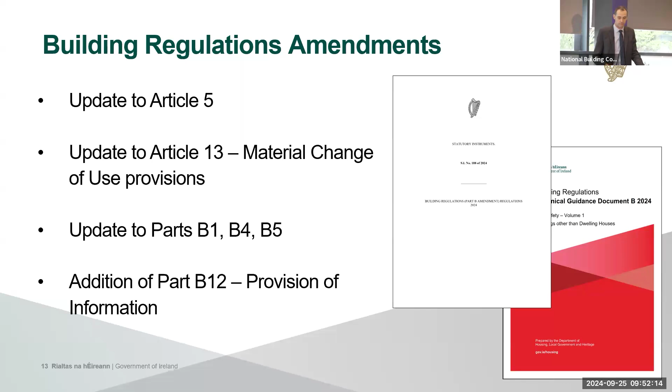It's divided into 5 key sections, and for 3 of those - means of escape in case of fire (Section 1), compartmentation (Section 3), and access and facilities for the fire services (Section 5) - there is a reliance on a suite of documents, cited documents within the TGD itself, that provides principal guidance for the design, configuration and layout of buildings. For example, for buildings containing flats, the current technical guidance document relies on provisions of BS 5588 Part 1, plus other parts of Technical Guidance Document B.

The application of those sections of those documents is dependent on the intent set out in the Technical Guidance Document, and it applies across the board. So the larger and more complex the building, the more of these documents apply.

As buildings get taller, the likes of the essential characteristics for the design of firefighting shafts is brought to bear in Section 5. As they get more complex, such as the provision of atria in buildings, the provisions are drawn from BS 5588 Part 7.

TGDB has existed in the state since 1991. These documents were long-standing and well-established, but in the interim, from the development of Technical Guidance Document B, particularly 2006, to the redevelopment, we're painfully aware that all of these documents have been withdrawn and replaced. And in many cases, the replacement has subsequently been withdrawn and replaced.

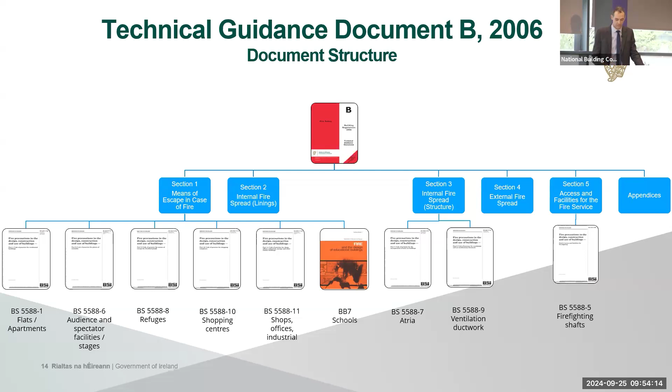For this and for many reasons, for clarity, one of the principal design considerations of the redevelopment of the technical guidance document was clarity and consistency of approach, a harmonious technical language, a single understanding of application of the proper provisions of technical guidance. The vast majority of what we can term principal design provisions have been incorporated directly into the technical guidance document.

For example, for the design of flats, there's a reliance on TGDB 2024, and all of the necessary provisions for the design of those buildings are incorporated directly into the technical guidance document, as they are for ventilation systems, firefighting shafts, the design of schools, and the design of atria. It is all in one document, one harmonious language, breaking those characteristics of interpretation across varieties of different documents.

There has been an expansion and modification of many of the provisions of the technical guidance document. The scope has been updated in TGDB.

The technical guidance document, at its fundamental principles, holds with all of the technical guidance documents in that they are designed around application towards simple and non-complex buildings. Buildings are, and can be, incredibly complex - complex in terms of internal configuration, in terms of use, and in terms of height.

For this reason, the technical guidance document does maintain its application to simple, non-complex buildings, but does have a limiting factor in terms of overall height. For care facility buildings, previously termed institutional, above 30 metres, the TGDB will no longer have effect, and for all other buildings, above 60 metres.

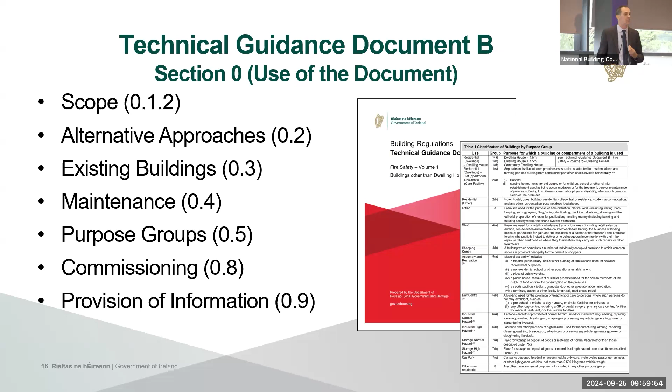This gives direct application to the two purpose groups and specific subgroups. So where there are specific clauses for day centres where children are accommodated on the premises, purpose group 5B2, there are specific clauses for schools under purpose group 5A. And so it allows a greater finesse and clarity in the technical guidance document.

There's been a holistic application to the technical guidance document in terms of its content and provisions. It doesn't operate by itself. We don't build a Part B building and a separate Part A building and a separate Part M building.

We build one contiguous building at the same time, even though we have separate approval processes through the building control regulations, particularly the fire safety certificate and disability access certificate. But we do build this as one building, satisfying all of the parts of the second schedule that are relevant at the same time, with that keen understanding that no one part can contravene another part of the second schedule as set out under SI 497.

So there has been an alignment of provision within the technical guidance document. The method of measurement of doorways for Part B and Part M is the exact same method of measurement. So we're not measuring doorways in two separate distinct ways. We measure doorways the same way under TGDB.

Our door widths have been aligned in terms of minimum door widths for escape to align with that for access and use, so that the 800mm requirement for Part M is the same as the 800mm requirement for Part B. And there's been a commensurate increase in capacities having regard to that.

Lobby dimensions in TGDM were slightly larger than that of TGDB, where they lead on an accessible route. And similarly, now for lobbies leading to a refuge, the lobby dimensions are exactly the same as a Part M lobby dimension. So we design the lobbies the same way, we design them once.

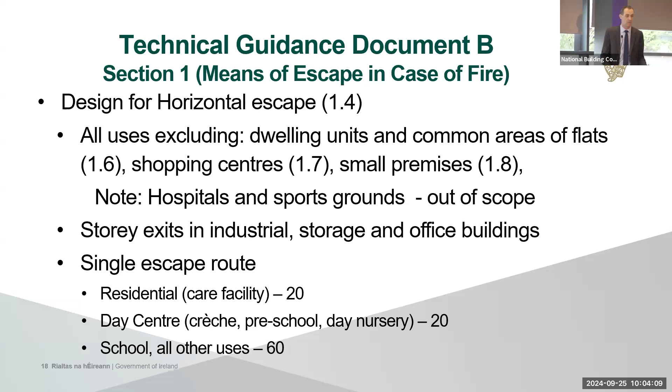And for single escape routes, there has been a maintenance of the single escape route characteristics for up to 20 persons for residential care facility buildings. For a day centre, creche, preschool or nursery, purpose group 5B1, there is a limitation of 20 persons in keeping with current guidance published by the National Directorate for Fire and Emergency Management, and for schools and all other uses, an increase from 50 to 60.

There's been an update to our provisions with respect to care facility buildings, additional guidance on door closing devices, both across corridor doors and bedroom doors, utilising magnetic hold open devices and free swing door closers. There's been a new provision introduced regarding walls between bedrooms, that walls between bedrooms are required to be fire resisting unless a suppression system is provided throughout the care facility building.

This provision doesn't apply between a bedroom and an ancillary accommodation or another part of the building—it's not a sleeping risk, so they always have to be fire resisting. And a subtle clarification that it doesn't apply between a bedroom and its associated ensuite, as an ensuite is considered to be part of the bedroom.

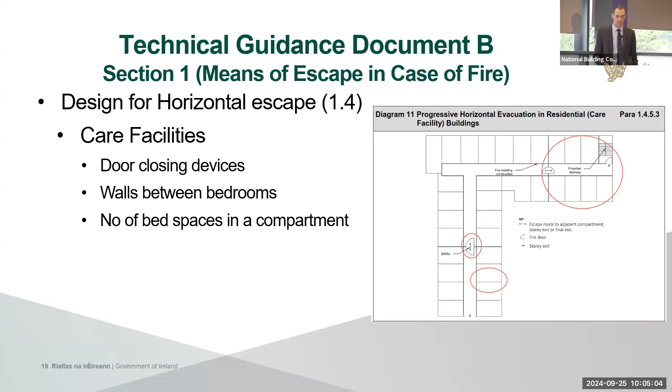There's a limitation of number of bed spaces in a compartment to 10. However, that's not applicable in respect of a building with a suppression system.

There's been modification to external escape routes, an upper threshold limitation for the use and application of external escape routes to a floor level of 11 metres.

We've included guidance in terms of audience and spectator facilities where there are specifically designed tiered seating spaces in buildings. There's a clarification in terms of equity of use of buildings, that where there's availability of exits, it must be available to all who would use the space. So irrespective of ability or of how an individual gets to seating, if they have an impairment, they have an entitlement to equality of availability of exits.

This again, the language for our audience and spectator facilities is aligned to that of Technical Guidance Document M, where there are similar provisions for tiered seating.

There are provisions incorporated in the technical guidance document for premises with a stage. Again, a clarification post the public consultation that these are buildings with a dedicated stage area, so specifically designed for theatrical performances with or without a proscenium wall. But where they do have a stage, we do have specific provisions and clauses brought into the technical guidance document.

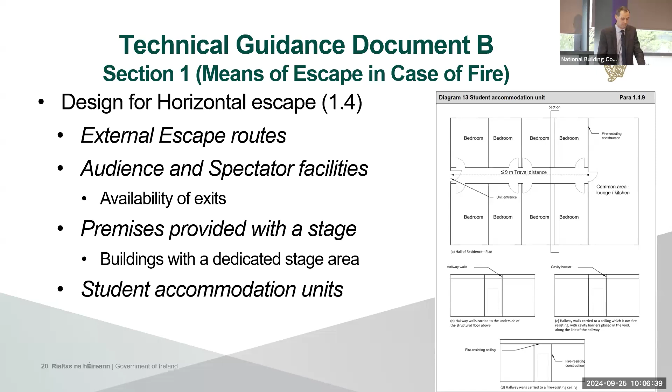There's also new provisions for student accommodation units, specific units designed for the use and exclusive use of student accommodation, which draws on guidance that is standing and well established.

For design for vertical escape pathways, for single escape routes for assembly and recreation or day centre buildings, purpose group 5B2, there's an upper threshold height of less than or equal to 5 metres before a second stairs is required. For a day centre building predominantly used for children, its limitations are ground and upper storey, where there's less than 20 children accommodated on the upper level, in keeping with current guidance.

Single escape routes are appropriate in buildings containing flats meeting the provisions of section 1.6, and for any other purpose group not already mentioned, an upper threshold height of 11 metres, above which an alternate escape route is required, or basements deeper than 3 metres.

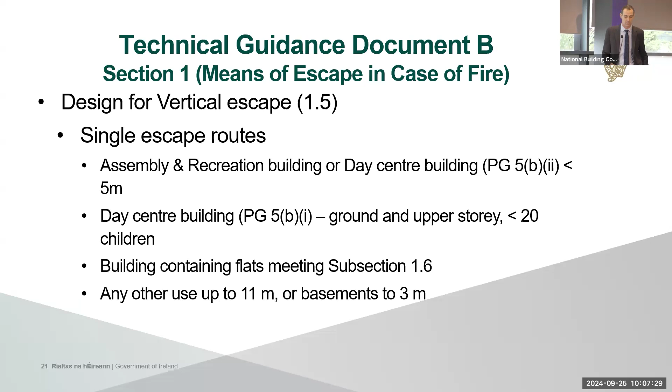Building on the guidance incorporated in Technical Guidance Document B 2006 reprint 2020, where new provisions were brought forward in respect of open plan flats, there has been a new section created, section 1.6, specific and exclusive to the design of buildings containing flats, so that the provisions in respect of escape within the unit, horizontal escape pathways, corridors and deck approach, and vertical escape pathways are incorporated explicitly in section 1.6, with additional provisions for ancillary accommodation to buildings containing flats.

Again, in keeping with the new definitions introduced in 2020, the flats in the state have been subdivided into 2 key types: those that have a protected entrance hallway and those that do not, termed for the purpose of TGDB as an open plan flat.

For PEH flats, the standing provisions of a travel distance within the corridor of 9 metres continue to apply.

For open plan flats, the fire safety characteristics are dependent on a number of key design elements: the travel distance within the flat, whether it's less than or greater than 9 metres; whether there's an available alternative escape route, be it a window directly to the outside for a floor less than 4.5 metres, or a door for flats operating above this height; and whether there's a suppression system provided within the flat, whereby there's no requirement for an alternative escape route, and the maximum travel within the flat is less than 20 metres.

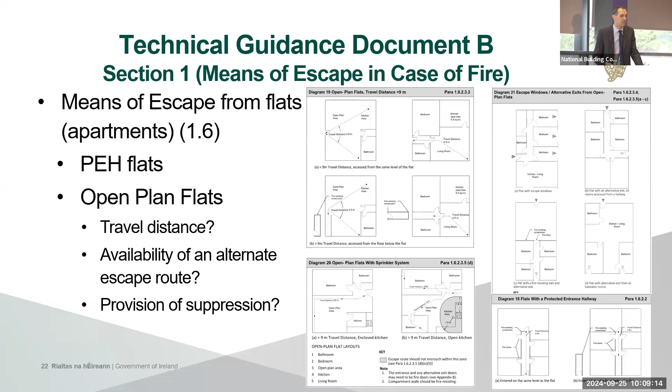There's been an expansion of the provisions with respect to maisonettes, or a flat that has its habitable accommodation split over 2 or more stories within the technical guidance document. Divided into 2 key types: those that have a floor less than 4.5 metres above ground level can be treated as a dwelling and have similar provisions to that of Technical Guidance Document B 2017, for which new drawings should look very familiar to anyone involved in the design of houses.

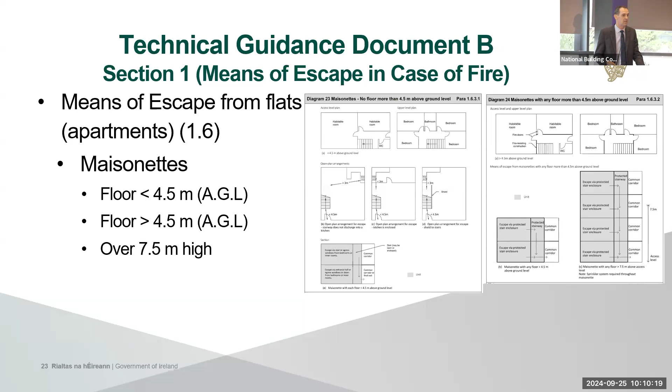And for a floor greater than 4.5 metres above ground level, for any maisonette above 4.5, or where there's a floor above 4.5, the maisonette deserves and should have a protected stairway enclosure. There's an additional clause given in the technical guidance document that where there's a change in height from the access point of the maisonette to its upper floor of more than 7.5 metres, a suppression system should be provided throughout the unit. Again, these provisions are substantially similar to that of Technical Guidance Document B 2017.

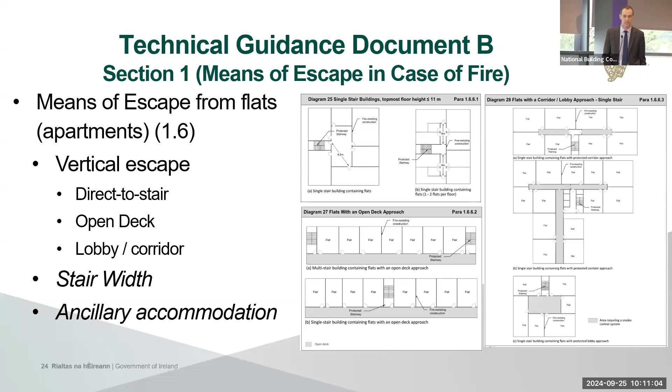There are provisions given in the technical guidance document for vertical escape, that's for direct to stair designs, for open deck designs, change from balcony approach to reduce confusion between a private balcony and an open deck approach, and a lobby corridor approach building. There's been a clarification in respect of the minimum stair width design of buildings containing flats, a minimum width of 1 metre, but also designed for the expected and simultaneous evacuation that should be designed into all our buildings containing flats, following on from the policy position provided through the report of the Fire Safety Task Force in 2018. And there's guidance with respect to ancillary accommodation to buildings containing flats.

Moving on to fire detection and alarm systems. In keeping with the functional requirement that has been introduced, a minimum provision of system for fire detection and alarm systems has been provided in a table in the technical guidance document so that all purpose groups are now covered through the direct explicit provisions of the TGD. These do apply to works to which the building regulations relate. All of these systems, then their performance is to be achieved through the national standard IS 3218.

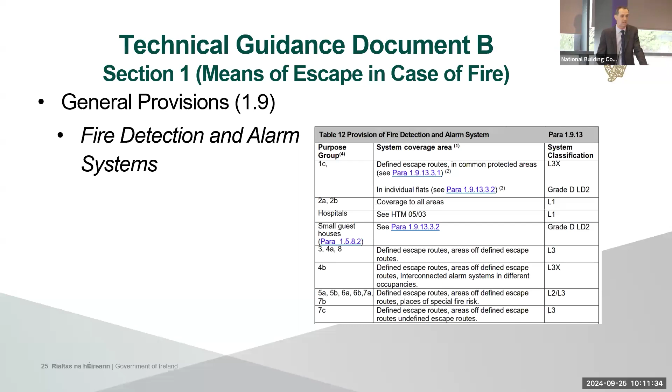Again, in keeping with the holistic approach to our guidance for our buildings, we do have a comprehensive suite of provisions for access and use of the built environment delivered through Technical Guidance Document M and the Disability Access Certificate application assessment and grant process provided through the local authorities.

In equal measure to our enhancements of accessibility in the built environment, there is a reasonable expectation for equality of egress from buildings as well. And for that reason, there are substantial additional provisions given in the technical guidance document for the provision of refuges in buildings.

The refuges can be provided in key locations in a building: in a stairway, in a lobby that has direct access to a stair, an adjoining compartment except in a building containing flats, in an external escape stairway provided that the refuge can be accessed appropriately, or in the open air for a common deck.

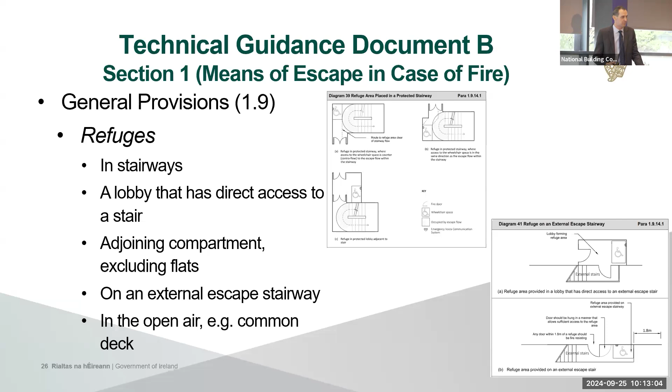It's important to note there is the universally accepted symbol for accessibility provided as part of the refuge, but it's also important to note that not all disabilities are visible, that these refuges are designed for everyone who needs to use them, be they in a wheelchair, or have a cognitive, dexterity or mobility impairment, as a place to rest while evacuating a building, and this becomes particularly important in our taller, more complex buildings.

Pause briefly on section 2 of the technical guidance documents, moving from means of escape in case of fire to the precautions of fire spread within rooms and spaces designed within buildings.

At the moment, the technical guidance document refers to 2 test standards for internal linings and elements of construction, BS 476 and IS EN 13501 Part 1, which are the European standards used extensively in our construction products regulations and declarations of performance.

For new works, new buildings, and for new elements going into buildings, there has been an alignment to the European test methodology, IS EN 13501 Part 1, for all materials going into buildings. Those classifications from A1 through to F, as might be familiar in a declaration of performance, are now expected for all construction products going into buildings. There is no reference for new buildings or works to BS 476 Part 6 or 7.

The terms and definitions of non-combustible and limited combustibility have been moved to Section 7 of the technical guidance document, and we'll come on to the design and intent and the application of Section 7 a little bit later on. There are surfaces excluded from these provisions, and there's an important clarification to the use and application of test methods. It is recognised that the European standards don't cover all construction materials that may be used and utilised in a building.

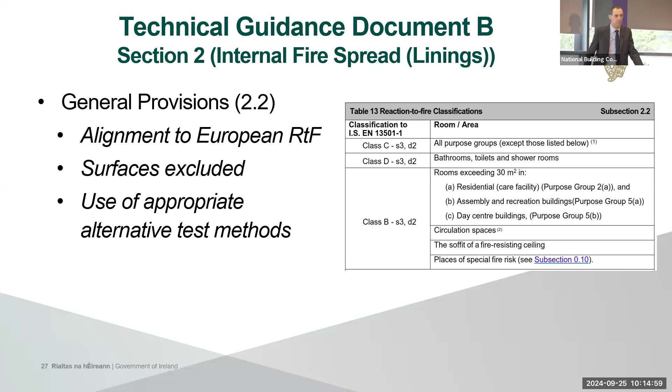To require them exclusively might work to exclude certain materials. However, there is an appropriate application of alternative test methods where the European standard would not be permissible, but where the equal performance in use and application can be proven.

For the construction of compartment walls and floors under Section 3, what is commonly termed the non-combustibility clause - the requirement for elements of structure to achieve a certain reaction to fire classification - has moved from 10 to 11 metres. Keen to point out that this is a provision of this technical guidance document, not of the building regulations themselves.

For buildings above 15 metres, there is a requirement that where a compartment floor meets an external wall, certain precautions are taken to inhibit fire spread bypassing the robust compartmentation provided within the building, by means of either a suppression system, a fire resisting zone of 900mm high, a projection of 0.5 metre, or a setback of 0.5 metre. There are precautions given in the technical guidance document for the junction of compartment walls with external walls to improve fire performance and flanking fire spread from one compartment to another.

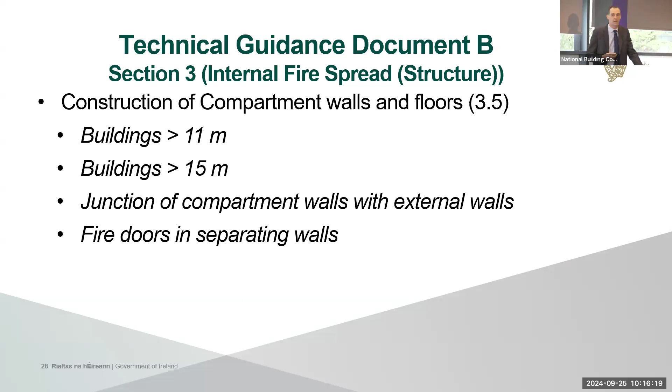There was a provision in Technical Guidance Document B 2006 for the provision of fire doors in separating walls, or walls dividing one building from another, capable of being used for evacuation. That is being removed from Technical Guidance Document B 2024 for new works, but there are again provisions given in Section 7 for existing situations.

Under the special provisions of Technical Guidance Document B, we've maintained provisions for car parks in buildings and included substantial additional content in respect of the design of atria, flats, care facility buildings, other residential buildings, offices, and other non-residential buildings, for which extensive provisions in keeping with current guidance and diagrammatic solutions are given for the design of atria within buildings.

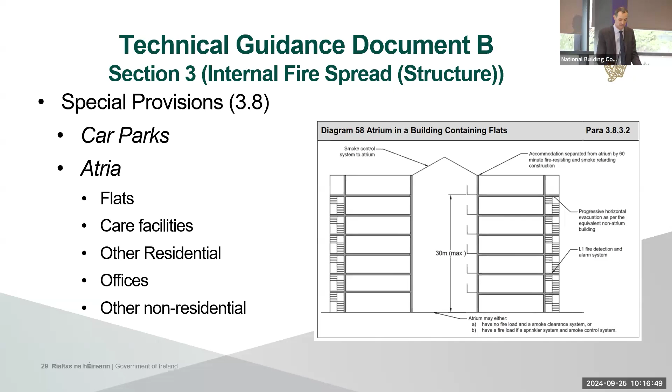I mentioned as part of the regulatory change to the functional requirements, there was a new regulation under Part B4 to inhibit fire spread on the face of the building. The guidance to give effect to this functional requirement is provided under Section 4.3 of the Technical Guidance Documents, the restriction of external fire spread on external walls.

A key threshold height for buildings is 15 metres, above which the entire external wall build-up, particularly for sleeping risk buildings, has to achieve a Class A2, S3, D2 reaction to fire classification, with the exception of appropriate excluded elements such as membranes, laminated glass, and thermal bridging materials.

There's an acceptance and acknowledgement of full-scale testing, that the BS 8414 test can be utilised in place of this requirement. However, it is the tested system and certified as such that can be provided on walls.

There's also an overarching requirement to fire safety in buildings, that irrespective of the height of the building, designers should be cognizant and aware of materials provided in buildings to ensure that they would not contribute to fire spread over the face of a building in a manner to affect the safety of the occupants.

Similar to our elements of structure and internal linings, the reaction to fire classification for external walls and for roofs is to the European test method. So again, a simplification of that test language, where we expect to see materials to have a declaration of performance - it is those declarations of performance that can provide the proof of proper materials.

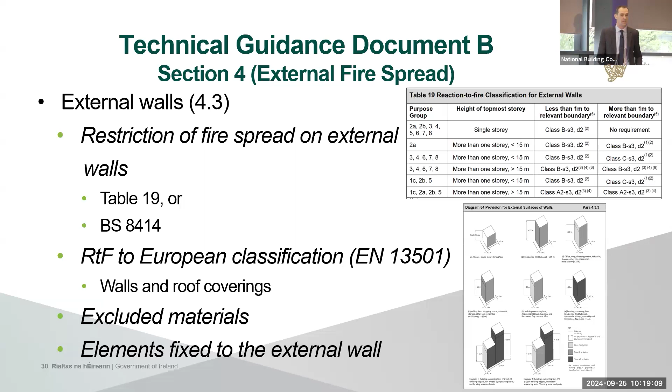Again, in keeping with international practice, where there are elements fixed to an external wall, such as a balcony, solar shading, or other materials, there should also be an adherence to the reaction to fire classification to ensure that external elements do not contribute to fire spread from one floor to the next, again with a threshold height of 15 metres. So where an external wall is constructed robustly to inhibit fire spread, the performance wouldn't be reduced by external elements.

For the key elements of our performance of space separation and restricting fire spread from one building to another, a building on fire should not disproportionately impact a building on a neighbouring site. There's been a new provision included for walls within half a metre of the boundary, where there are limitations on openings in the external wall, maintaining the provisions for between half a metre and a metre, and for external walls greater than a metre, the normal reaction or external fire spread calculations can be used and applied.

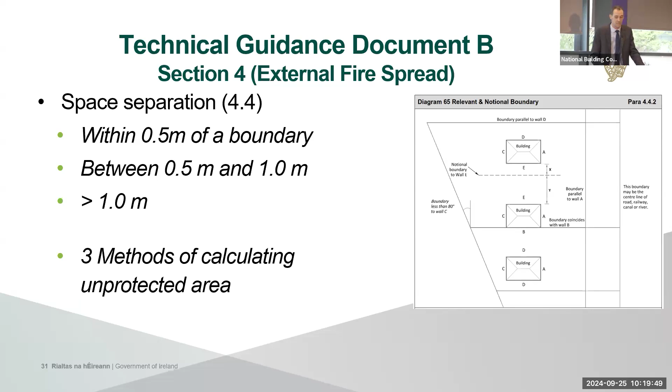Moving on to section 5 and some of the changes to access and facilities for the fire service provisions. There's been an introduction of the requirement, or the measure, for dry risers in sleeping risk buildings and shopping centres with a topmost floor height greater than 11 metres but less than 20 metres. For any building above 20 metres, the normal precautions of a firefighting shaft, as designated in technical guidance document B - that is the stairs, the lift and the lobby incorporated in a 2-hour wrap - are to be provided in buildings.

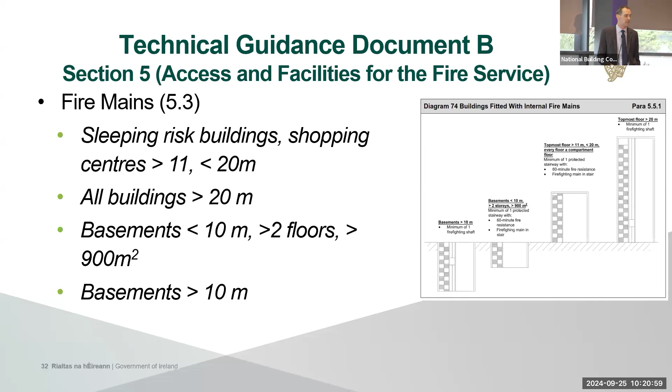Similarly, for basements that have a depth of less than 10 metres but more than 2 floors, more than 900 metres squared, should also have, under the technical guidance, a fixed dry riser or dry falling main located in a protected stairway. The same precautions for basements deeper than 10 metres requiring a firefighting shaft have been provided, and new diagrams have been provided in the technical guidance document to provide visual clarity to the measures.

There are provisions given in the technical guidance document for the electrical isolation of key systems, for the full isolation of premises, for high voltage discharge lighting, as is found in the current technical guidance document, and for photovoltaic panels, all relying and working with the electrotechnical standards IS 10101 published by the National Standards Authority of Ireland.

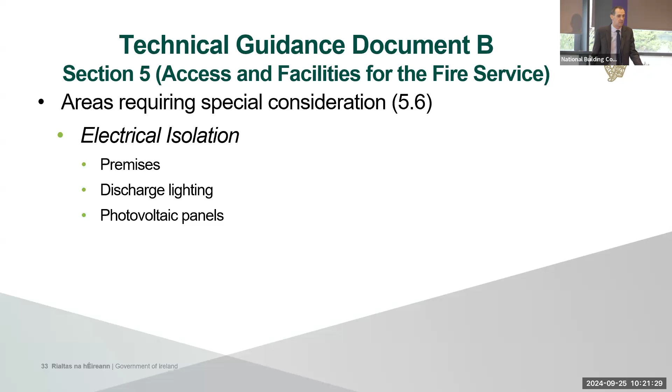There is a whole new subsection brought into the technical guidance document for smoke control systems. This section incorporates and brings together all of the relevant provisions relating to smoke control measures in buildings, that is the defined movement of smoke in a predefined and determined manner. It brings together provisions that might have been found in an array of documents, and highlights the need for assessment where there are multiple systems installed in one building to ensure that one system does not work contrary to another.

The section has been designed in a deliberate manner. Subsection 6.1 covers the general provisions. Sections 6.2 through 6.5 are the building specific characteristics, moving from the most common to less common scenarios. We expect most buildings of 2 or more stories to have a protected stairway, so section 6.2 comes up first to give guidance on protected stairways. All buildings above 20 metres require a firefighting shaft, therefore it's under section 6.3. Some buildings have an atrium, some have a basement, covered under 6.4 and 6.5.

The following 5 subsections are use-specific provisions: flats under subsection 6.6, industrial and storage buildings, car parks, assembly and recreation buildings specific to ventilation of stages, and finally shopping centres under subsection 6.10.

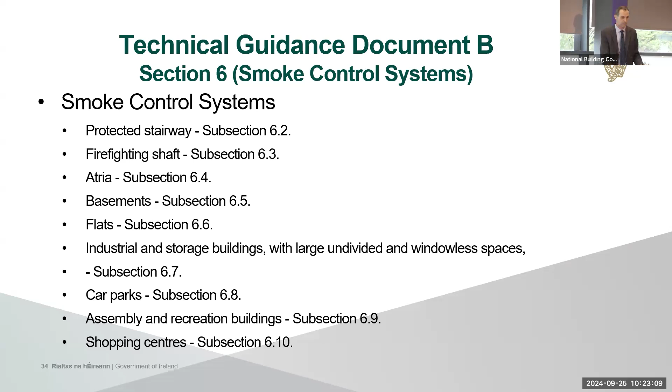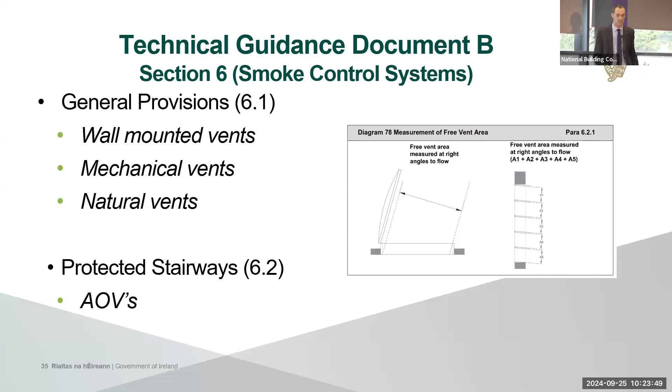Under the general provisions of section 6.1, there is guidance given in respect of wall-mounted vents, with additional precautions given in the technical guidance document where a wall-mounted vent is provided on a wall that is near to or on a boundary, to ensure that the vent can operate for the lifetime of the building. For the design and operation of mechanical vents, this draws on the harmonized European standard 12101, and for natural vent systems, there's a particular clause in subsection 6.2 that all stairways designed to the technical guidance document be provided with an AOV with a clear effective area of 1 square metre.

Moving on to section 7, introduced in keeping with and to support government policy with respect to our underused and underutilised built environment, to support the regeneration and revitalisation of our towns and cities. There is a measured approach to the application of section 7, again drawing on guidance that has been in place for quite some time in other technical guidance to good effect.

As a first pass and first approach, it is intended that sections 1 to 6 should be utilised where possible in the redesign of existing buildings, applying those key clear provisions and precautions given in those initial sections where possible. Where there are particular difficulties in application, be it combustibility of a stairway, stairway widths, provision of lobbies, or combustibility of floor build-ups, there are prescriptive provisions given in section 7 that can be directly applied in a prescriptive manner for the use and reuse of existing buildings.

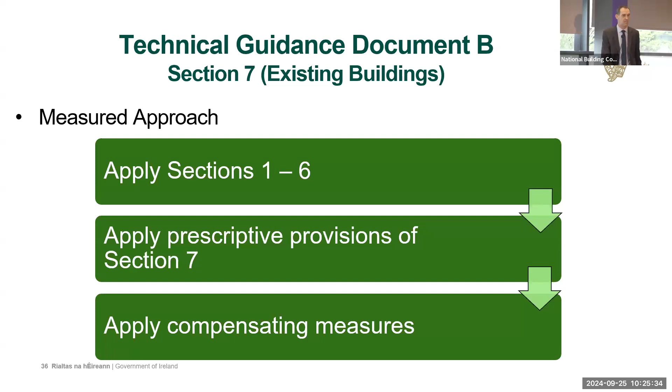It is also recognised that these by themselves may not be sufficient in terms of the design and reuse of existing buildings. Existing buildings are quite vernacular, they can have their own individual characteristics. Therefore, there has been an expansion of the application of compensating measures to all parts, all sections of the technical guidance document, with the proviso that the base understanding and obligations of fire safety are still to be achieved in respect of existing buildings. The development of the section represents a consolidation and clarification of all relevant provisions relating to existing buildings into one key seamless section, bringing provisions that were sometimes subtle and hidden to the fore in key sections.

Section 7 has been designed to mirror that of the first 6 sections. So 7.1 is means of escape, 7.2 is internal fire spread linings. It's designed to provide that handshake and clarity back and forth between sections 1 to 6 and section 7.

We did mention that for new buildings and new works, IS EN 13501 Part 1 is to be applied for reaction to fire classification. However, this does not extend to existing buildings where the existing fabric of the building is appropriate and would meet equivalent performances. If there are good materials in a building, be it a floor build-up or a lining, that would meet those fire safety requirements, there is no need under section 7 to remove those good, appropriate elements. So BS 476 has been retained for existing elements in existing buildings.

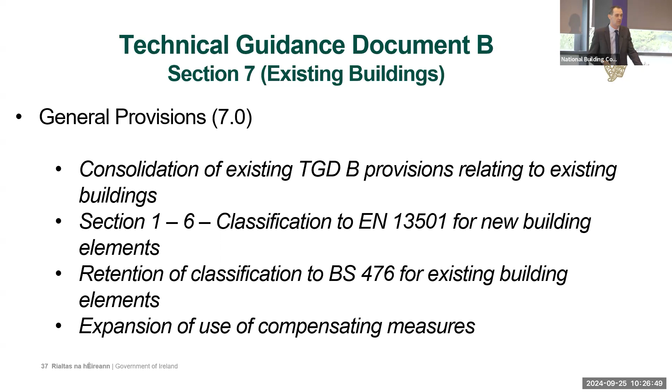Aware of the long-standing nature of Technical Guidance Document B 2006 and its foregoing editions, and of the changes incorporated in sections 1 through 6, there are key additional provisions in section 7, where provisions and measures appropriate under the current guidance can continue to be used. For example, while the minimum doorway width has been increased to 800 millimetres for 60 persons in section 1, a 750 millimetre door width at 50 persons flow is appropriate under section 7. If it is there, it can be used and retained in place and there's no need to increase widths.

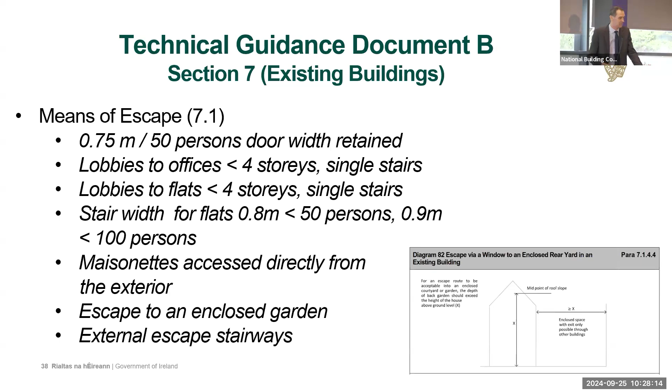For lobbies to offices, there are specific provisions where the lobbies don't need to be provided. As for lobbies to flats, to support and incentivise the reuse of existing buildings with a topmost floor count of less than 4, the topmost floor height requirement is being removed. For stairways to flats, widths have been reduced in proportion to the number of occupants using it, and there are additional provisions given for maisonettes accessed directly from the outside of the building, as can happen in many of our urban towns and cities, for escape to an enclosed garden, and the appropriate application for external escape stairways at any height of an existing building, but this is limited to existing structures.

The provisions with respect to compartment floors in existing buildings and compartment walls above 11 metres have been retained, as has what's termed diagram 17 or diagram 22, that is the closeout of openings by window framing and above ground drainage systems. These were common approaches used in Technical Guidance Document B 2006 and its foregoing editions, and again, if that system is in place, there's no need to take it out owing to its exclusion from section 3. It remains in section 7 for existing buildings.

And for doors and separation walls, again removed from section 3, where they are in place, and if there's no viable alternative to their use and application, they can continue to be used for means of escape.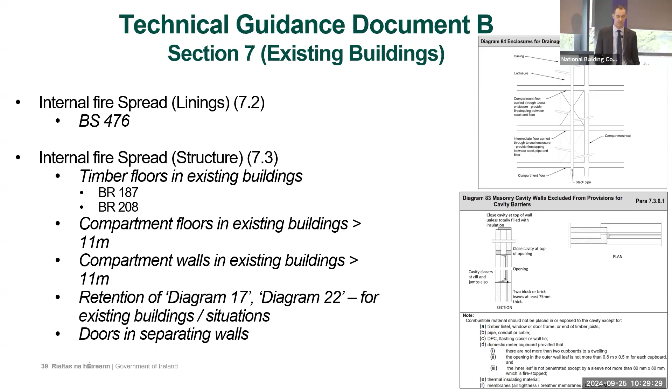Finally, in terms of the 8 principal sections to the technical guidance document, there is a new section provided for the provision of sprinkler systems in buildings. First and foremost, for buildings containing flats and student accommodation units that have a topmost floor height above 15 metres, a sprinkler system is required throughout that part of the building.

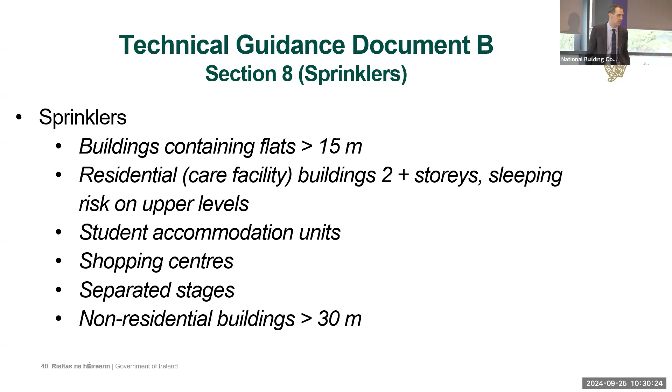For residential care facilities with more than 2 storeys, there's a ground, one, first arrangement where there's a sleeping risk on an upper level, there's also a requirement for a suppression system, recognising the design and use of the building, the escape methodologies, the progressive horizontal evacuation, and the need to defend in place. We've maintained the provisions for shopping centres, separated stages as currently applied, and clarified the standing of buildings with a topmost floor height, non-residential building above 30 metres, requiring a sprinkler system.

There's been subtle modifications to the appendices: to Appendix A for fire resistance classification to I.S. EN 13501 Part 1; to Appendix B, fire doors, for the provision of mandatory safety signage, for identification of the fire door and its performance on the door to be fixed in place, and for glazing, performance of uninsulated glazing on fire doors.

There's a modification to Appendix D for high hazard storage buildings, that any storage building that has a racking with a topmost height above 7 metres is to be considered high risk, and the commensurate fire precautions set out in the various sections of the technical guidance document are to be applied.

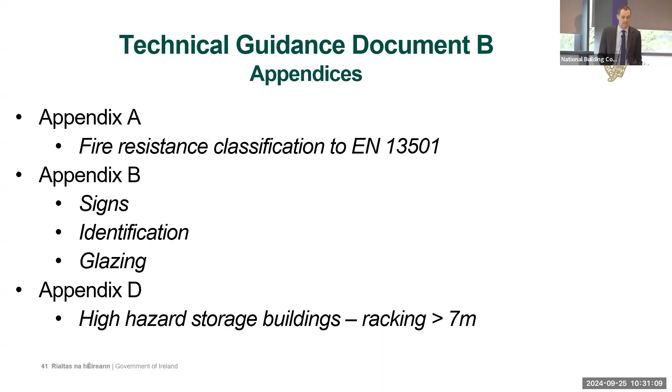And with them, the heights moving across the top, and particular characteristics, provision of stairways, provision of suppression systems, provision of compartmentation, provided on the vertical rows.

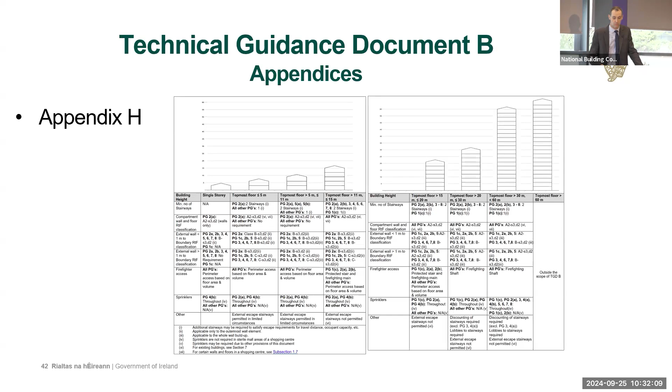When does all this take effect? The Technical Guidance Document B was published, and the associated building regulations were published by the Minister on 26 March 2024, with an implementation date of 1st May 2025, so a 13 month time frame to understand, appreciate, and begin to apply the provisions.

For any works that start before that effective date, TGDB 2006 continues to apply with no end date. For works starting after 1st May 2025, there has to be due consideration for projects that are at a substantially advanced stage. If the technical guidance document were to come into effect immediately, there would be significant disruption to construction, and this is in keeping with all implementations of technical guidance changes.

So for works that start after the 1st of May, where there is a planning application lodged, or a Part 8 notice published, or a decision by An Bord Pleanála with respect to a strategic housing development, or a fire safety certificate granted before the 30th of April, before the implementation date, and where the works start after, they can continue to operate under the current guidance, provided the works are substantially complete by the 30th of April 2028, as defined under the building regulations.

We do expect over this timeframe that the use and application of B06 would reduce, and the use and uptake of B2024 would increase, with full implementation sometime on or after April 2028.

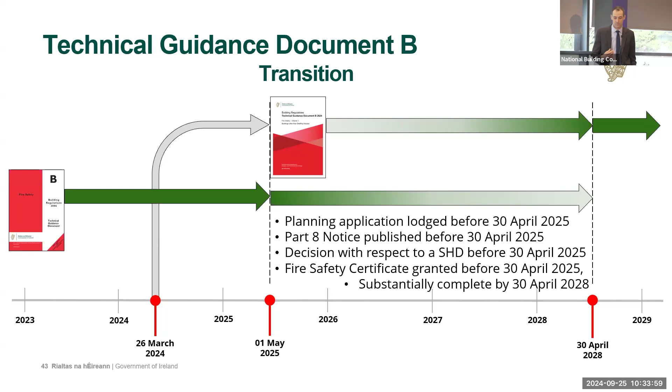These provisions are very much specific to the building regulations. They relate to the building regs only. They are not transposed directly into the control regulations. The control regulations are there to control the applicable building regulations.

Finally, on the complementary initiatives, it was clearly recognised as part of the redevelopment process of the technical guidance document that a lot was done through it, providing a substantial foundation for moving forward. There is also always a need for continuous examination of fire safety in the built environment.

First and foremost, there was an information note on alternative approaches to demonstrate compliance with the building regulations, published in tandem with the technical guidance document, to clarify the standing of Article 7.3, the use and application of alternative approaches, and to highlight the need for care and consideration. Where one technical guidance document is not utilised, it can have an impact on others, to ensure that all 12 parts are achieved in the one design.

The department has engaged with Construct Innovate, the National Construction Technology Centre, to further examine key issues relating to building regulation compliance and conformity in the built environment.

Just three of the key topics being examined, as recently announced by the Minister: fire safety and building regulation compliance and conformity in existing buildings, building regulation compliance requirements in universal design buildings, and standardised construction details for particular modern methods of construction.

The department also established a fire safety research group composed of representatives from Building Standards, the National Directorate for Fire and Emergency Management, and fire authorities, to examine ongoing issues and carry out research on a variety of topics, including international benchmarking, means of escape, and smoke control in flats, car parks, etc., for which we have already gone to tender on the first of a number of pilot studies.

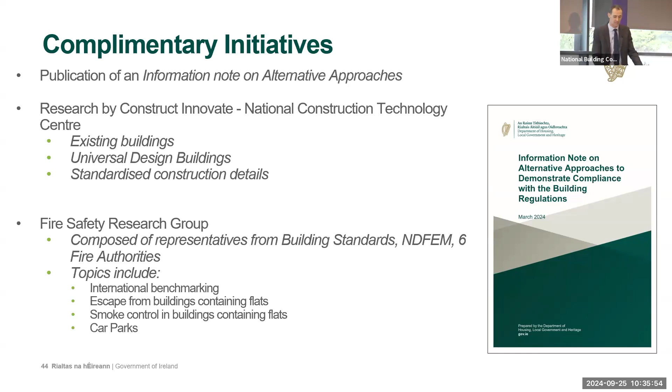In conclusion, the overarching objectives of the development of the technical guidance document include the provision of clarity, a consistency of approach to our technical language, flexibility and simplicity in its application, and to align the technical guidance to national policy, be it equality of access or national policies on evacuation and alert in buildings.

To support the reuse of existing buildings, as has been prescribed through many schemes, through the likes of the publication of Bringing Back Homes, to enhance the provisions of safety for all through the measures set out in Technical Guidance Document B, and to align the Technical Guidance Document with the ongoing changes in building regulations.

In the timeframe between the publication of B06 and B2024, every single technical guidance document, A through to M, has been updated. So we do consistently look at these requirements of alignment.

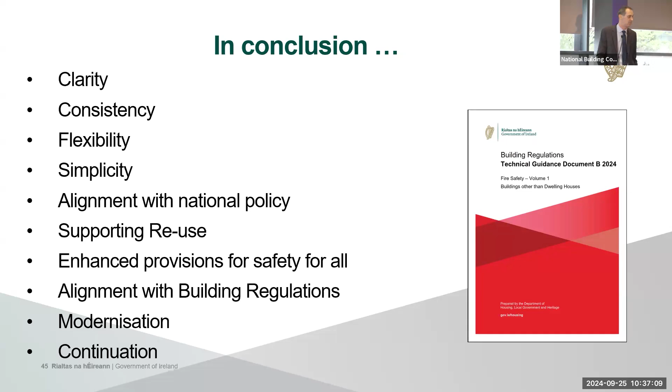To modernise the technical guidance document and to provide a strong foundation for moving forward in terms of fire safety, the science never stops and the examination doesn't end. So we'll continue, as always, to keep the documents under examination. Thank you for your time this morning.